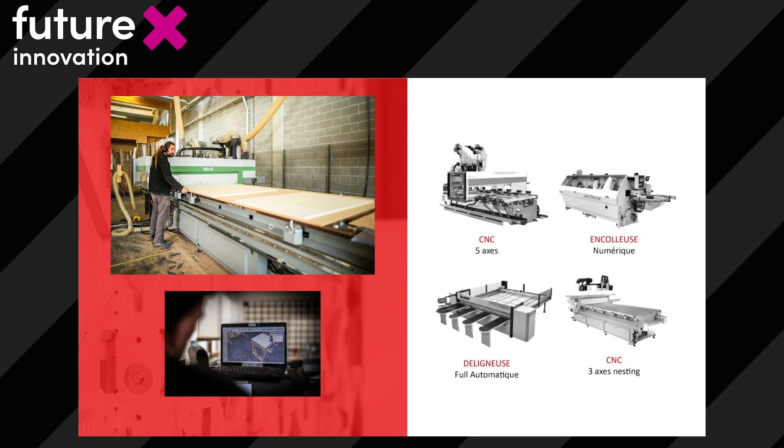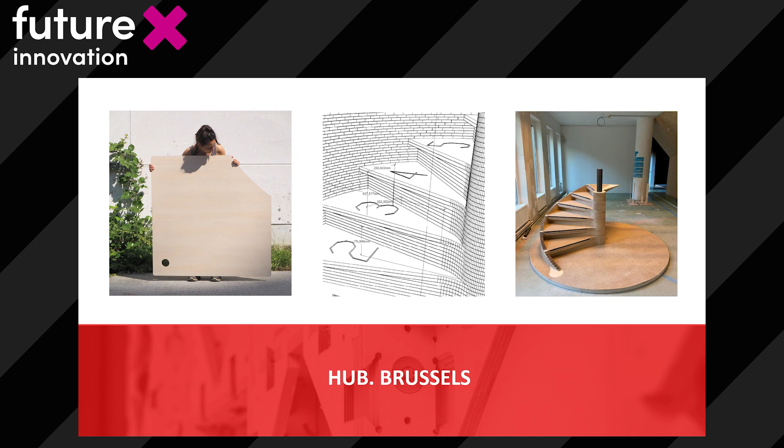I will show you 2 examples that we have realized. The first one is a staircase made with 600 tables from the former cafeteria of the European Commission, which is located 8 kilometers from my workshop. We processed more than 1,500 pieces assembled one by one for this project. It was very fun. So you can see the table we used, the beginning of the construction, and this is what it looks like now. And I like the idea to make stairs with a table.

The second one is a bench. It's a bench sculpted in 3D and made with old laminated beams that we reclaimed from a construction site 500 meters from our workshop. So you can see the laminated beams. I think it was 40 pieces. It's always a big puzzle. And when it's finished, it looks like that.

So I said I have 2 companies, so this is what I do with my first one. And with the second one, in this will to build differently to save our resources, we also develop our own product, the mods. So the mods is very simple. It's a small wooden frame that we use to create a structure.

That structure can be a stand, an office partition, reception desk, a structure for a theater set, a podium, store layout. And on this structure, we put finishes and accessories according to the customer specification. This allows us to have a multi-sectorial product that can be assembled, disassembled, reused, and evolve over time. You have some examples of what we can do with the mods. Here we are. This is a box office.

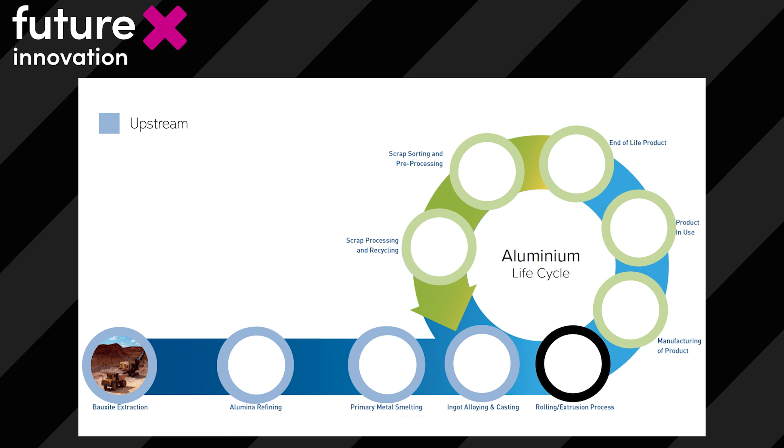Aluminium's life cycle is considered to be one of the greenest metals on Earth. Okay, so it's a very good green material. In terms of the life cycle of aluminium, we're not directly involved in the upstream process. So here we've got bauxite mining, alumina refining, smelting and casting. So that's making the aluminium itself. The part which we do is the extrusion, so that's shaping the profile.

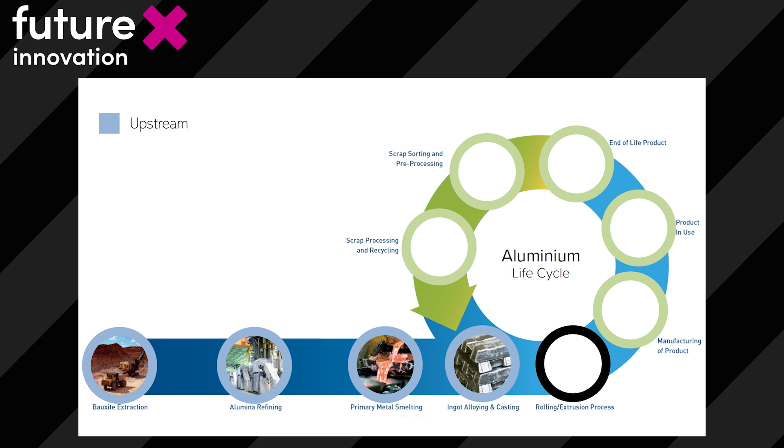Okay, so we're an extrusion company and we supply to manufacturers across the UK. Over 500 manufacturers make windows and doors and construction products out of our materials. So aluminium is a relatively new material, actually. It was actually discovered in 1825 by a Danish chemist, Hans Christian Ørsted.

At that point, aluminium was more expensive than gold. Okay, so it was a very expensive material to produce. It wasn't until 1886 that a high-volume, low-cost method of producing aluminium was produced, and effectively that made it commercially viable. It went from being more expensive than gold to being around the same price as silver. Okay, and it took 61 years development, so that's one of those innovations to make aluminium sustainable.

Okay, there we're not talking about carbon footprint, it's cost, but obviously the reduction in cost shows you what the embodied carbon was. It went from over $545 to $17 per pound. So 3% of the cost, a significant saving over 61 years. Okay, there's still further developments on aluminium as well. Alu plus C minus is a carbon initiative, so it's low carbon aluminium. So we're trying to reduce the amount of embodied carbon content within aluminium.

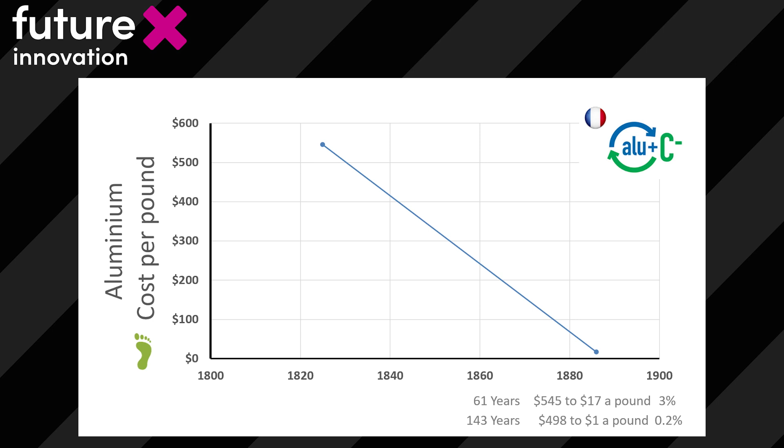As we probably all know, aluminium is 100% recyclable, and one of the important things about aluminium is it doesn't lose its material qualities when it's recycled. So aluminium can be indefinitely recycled. You can keep making new cans, new buildings, new different products out of that. So it doesn't lose its material qualities.

And one of the key drivers in that recycling is that aluminium, when it's recycled, only takes 5% of the original energy that the raw material takes. So there's a commercial incentive to recycle aluminium as well.

Recycling of PVC and other materials is relatively new, but with aluminium, when I was a young boy growing up, there was always a scrap man collecting aluminium. I remember Blue Peter, and there was a Blue Peter appeal collecting milk bottle tops. Okay, so aluminium has always been a material which has been very good for recycling.

The stats behind it are quite impressive, in fact. 75% of aluminium which has ever been produced is still in use today. Okay, so very little aluminium actually goes to landfill. So it's a very sustainable material.

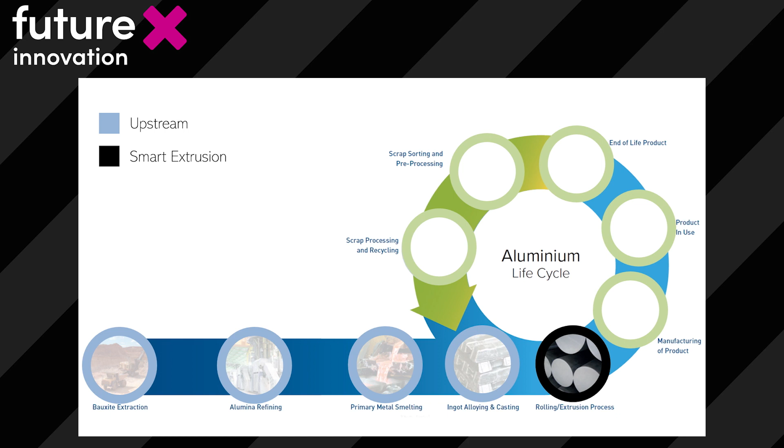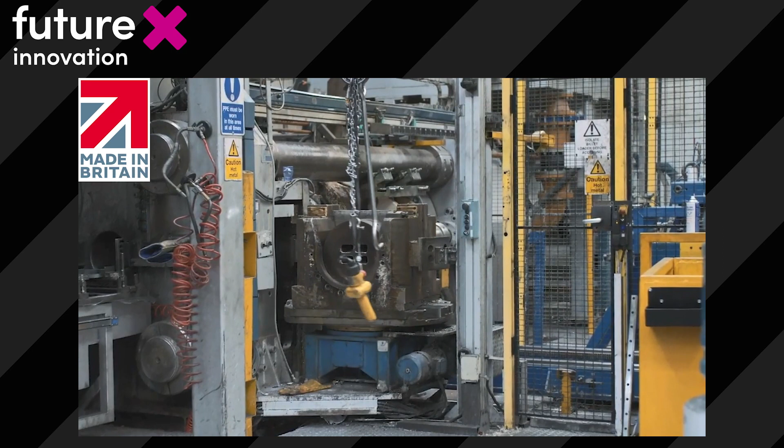As I said, Smart's process is the extrusion, which in the supply chain is that little area there. And I'll just show you our extrusion presses. What we do is we take the billet and we warm it up to about 500 degrees C. 500 degrees C, the melting point of aluminium is 600. So it's less than the melting point. It doesn't look any different. It's just got a warm temperature.

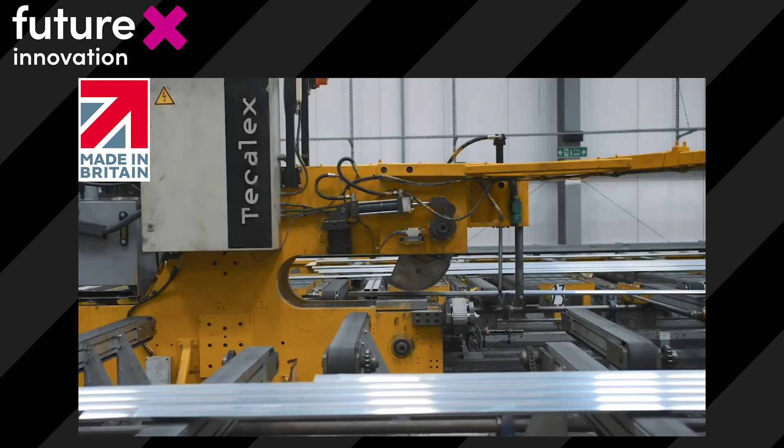But then we'll push it through a die. The extrusion die is shown here, and that shapes the profile. And this is a typical extrusion, which would just come out the other end. What Smart's supply is lengths of profile, which can then be used to make building products, whether that's windows, doors, or

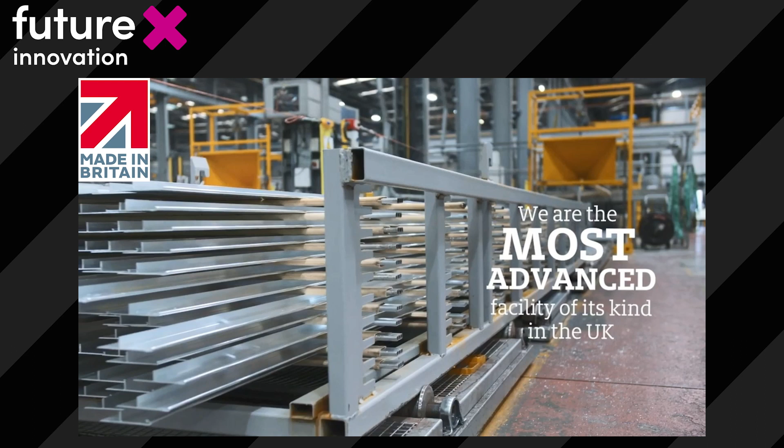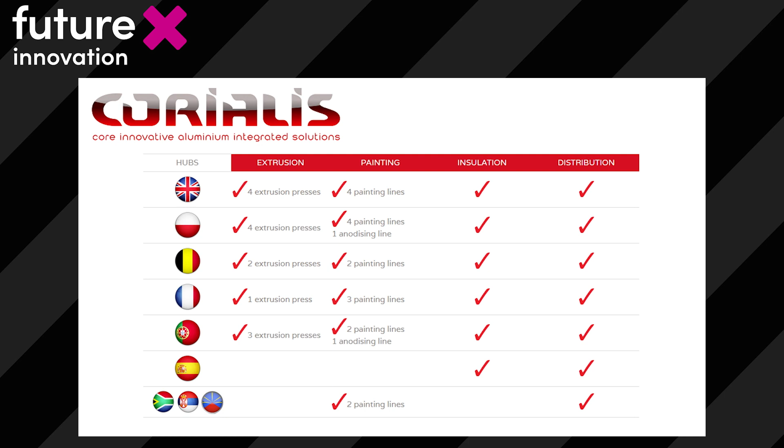different products. Our facilities: we've got 4 extrusion presses in the UK, and the output of those 4 presses is 40,000 tonnes. So a significant amount of aluminium is processed through that facility. We're part of a larger group, and across the group we've got 16 presses based around Europe, servicing each individual market. So we've got Belgium, France, Poland, Portugal, all with their own extrusion presses. We also do thermal breaks, and we also distribute out to the fabricator base.

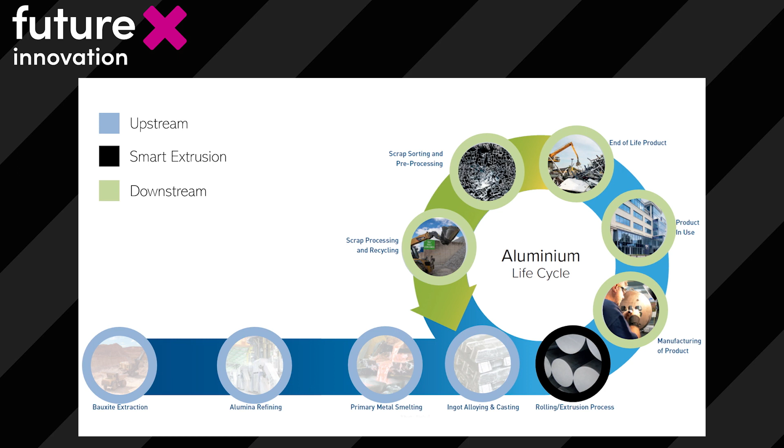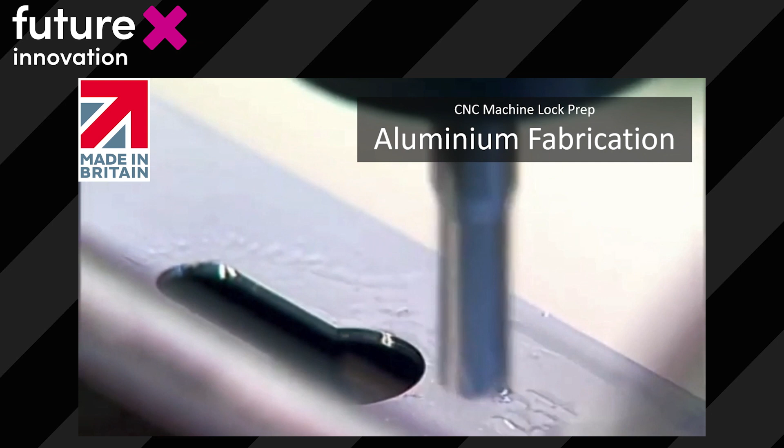Downstream to Smart's is the extrusion process. So Julien explained about CNCing of timber. Our fabricators, our manufacturers will take that profile and they'll do the preps in there. So there might be a hole, for example, for a keyhole. It might be a hole for a lock. So they'll prep and manufacture the material so it becomes a window or a door. You'll see the shape just being produced there is a keyhole for a window or for a door.

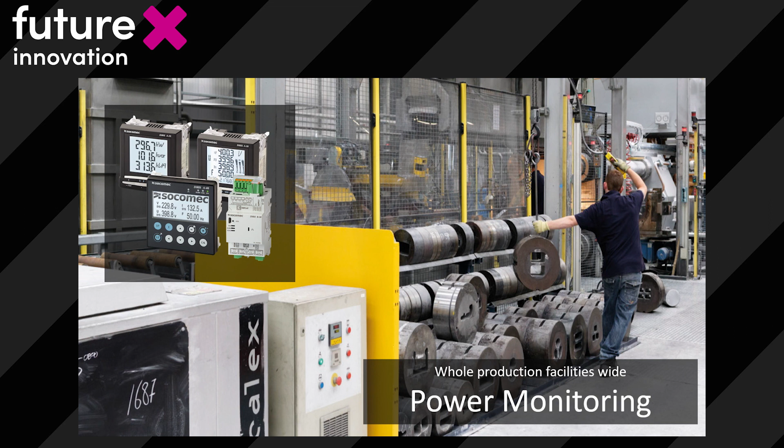Simple examples of that: every single piece of kit at Smart's has got a little device on it, and it shows you how much energy is being used on those individual devices. So it allows us to see if anything's malfunctioning. It also allows us to see if we can improve any of the equipment, and that reports to a central database. And that allows us to also predict what our greenhouse gas emissions are. And you'll see they've dropped significantly. So over 5 years, we've halved our greenhouse gas emissions.

So you saw our footprint increase, but over 5 years our greenhouse gas emissions have halved. That's partly through economies of scale, because we've expanded, we're doing more. But if we look in real terms, we're about a third less greenhouse gases than what we were in 2016. So significant savings in terms of the benefits of what we're doing.

The embodied carbon of a piece of aluminium is around 5 kilos of CO2 per kilo of aluminium. And that can be broken down to billet production, so the actual raw aluminium production, transportation to Smart's, activities, and then distribution out to our manufacturing bases. So it gives you an idea of the extrusions. Our contribution is about 5% of that, so the majority is the actual aluminium production, but as we've seen, there are already enhancements bringing down the aluminium production figures.

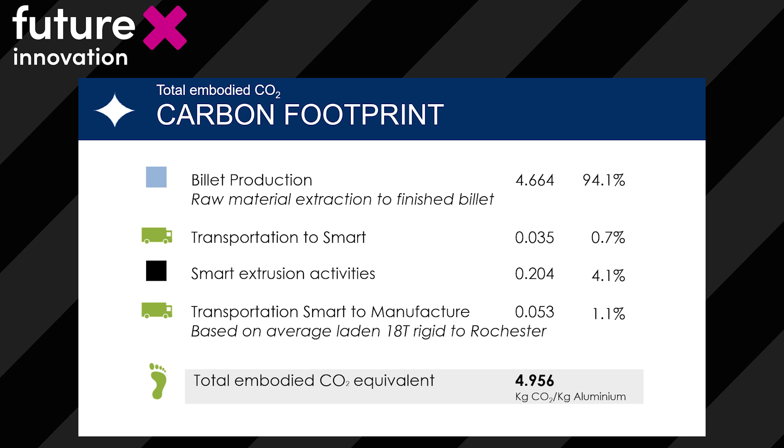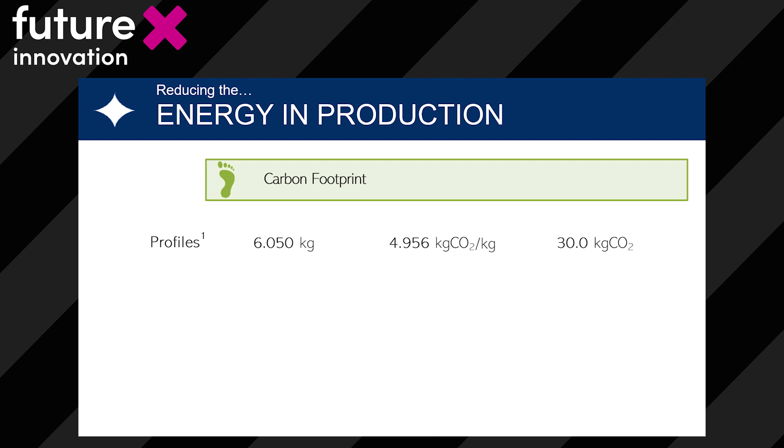If we look at a typical window, because 5 kilos doesn't really mean that much, this window is just over a metre wide by a metre high. The amount of aluminium in that window is going to be about 6 kilos. So if we said it's 5 kilos of CO2, it works out that we've got 30 kilos of CO2 on a typical window. If we compare that to the glass, this is based on Saint-Gobain's data. Saint-Gobain have got 34 kilos per square metre of product, so their contribution is about 50 kilos of CO2.

Okay, so the total on a new window is around 80 kilos of CO2. If you're wanting to work out what that is in real terms, it's around a car journey of around 220 miles. So the distance to smarts is about the embodied carbon in one window, so a car journey. So we can see we're very low in terms of our carbon footprint.

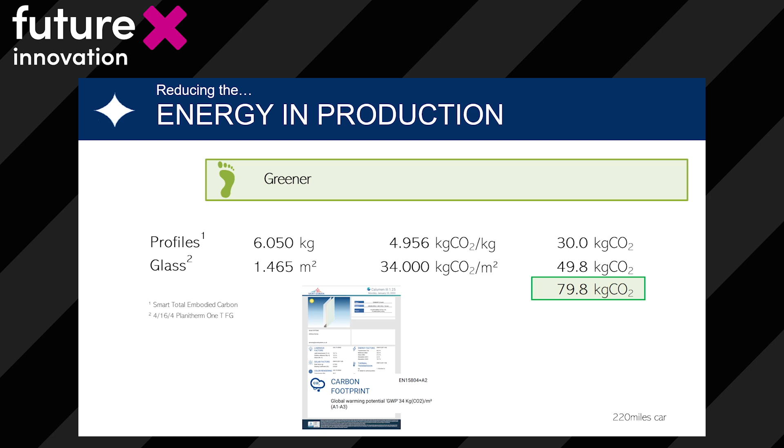What's probably of interest to you guys is how the windows can make things warmer. So that's the U value of the window, which is the energy efficiency of the window, and what energy savings we can entertain. Windows, they're not relatively new. We've been using windows since the 1700s.

It wasn't until 1995 that we had a building regulation for conservation of fuel and power. So any building stock before 1995, potentially if it's single glazed, it would be as high as 6, but the thermal performance of windows before 1995 was unregulated.

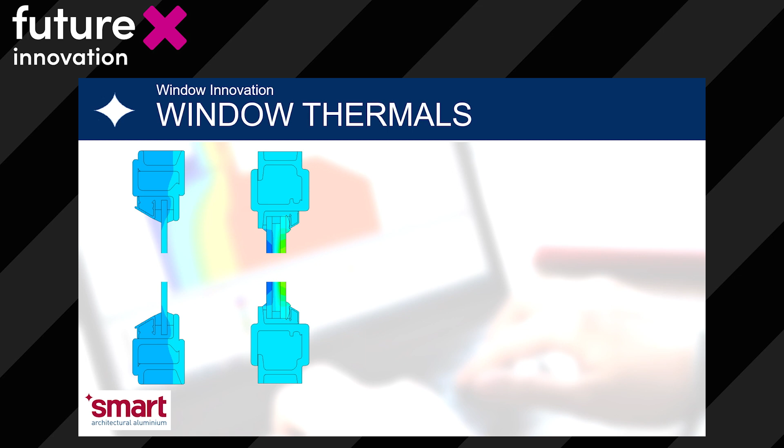So if we take a typical section of a single glazed window, you'll see the colour contours across there. It's all showing blue, so it's quite a cold window. The first generation double glazing would have been non-thermally broken frames, probably with an air fill instead of any gases within the cavities. So you're starting to see temperature differences across the glass, but the frames are still relatively cold.

Current generation of windows have got thermal breaks within the system, and we've got gas fills within the glass units. So that's a typical current double glazed system. It's got polyamide as a thermal break within the system, and that helps stop that heat transfer. So it stops that cold air going in, and it helps reduce that heat transfer across the window.

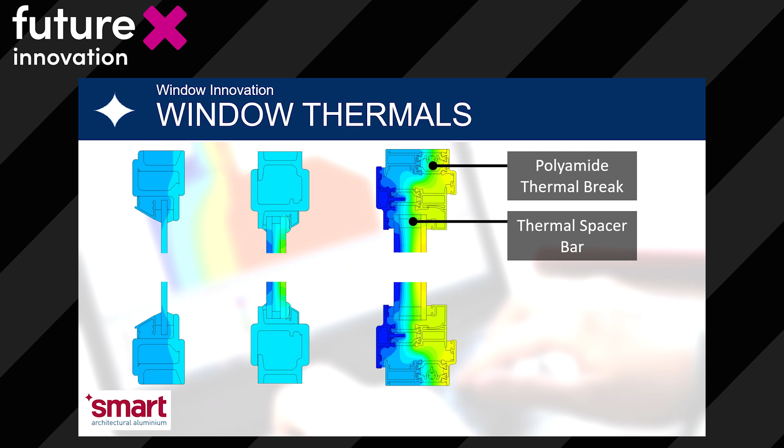The glass has got thermally broken spacer bars. If you look at an old-fashioned window, the spacer bars would have been silver. You'll see all modern windows tend to have a black spacer bar, and that's because it's made out of plastics, because it's the thermally enhanced spacer bars.

But glass technology has improved significantly as well. So we've got low emissivity coatings, which is effectively a very thin silver layer on the inside sheet of glass, which reflects the heat. If anybody remembers Pilkington's K adverts, Pilkington's K would be a low emissivity coating, which is a hard coat. And also we start to fill the glass up with argon. So that's thermal enhancements to a window.

The centre pane, which is the heat loss through the glass, for a typical single glazed unit, as I said, is around 6. For first generation double glazing it's around 4.74. For current generation double glazing with fills it's around 1.5. So Pilkington's K glass was 1.5, but they've improved the technology, gone to soft coats, and now we're looking at 1.0 as a centre pane. That gives you the heat loss through the glass as watts per metre squared Kelvin.

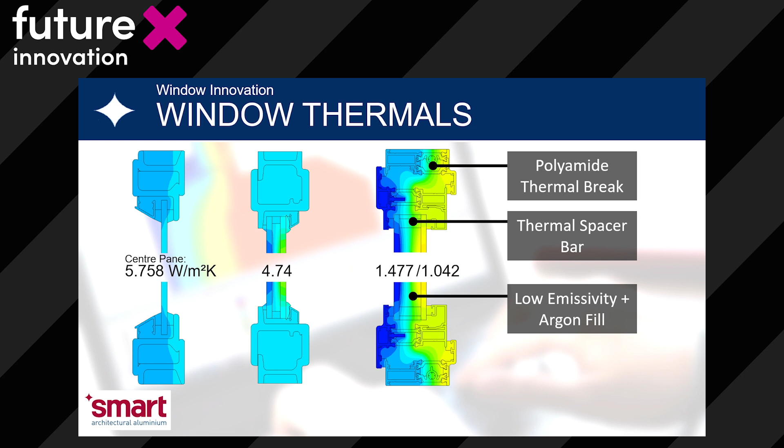If we look at triple glazing, things are moving on to triple glazing. Basically, we can halve our heat losses with triple glazing. So a 1.0 centre pane will drop down to a 0.5 centre pane. So it shows you what enhancements we can do. And really, we're seeing a lot more call for triple glazing, particularly in the new build market. It's now accounting for 5 to 10% of installations.

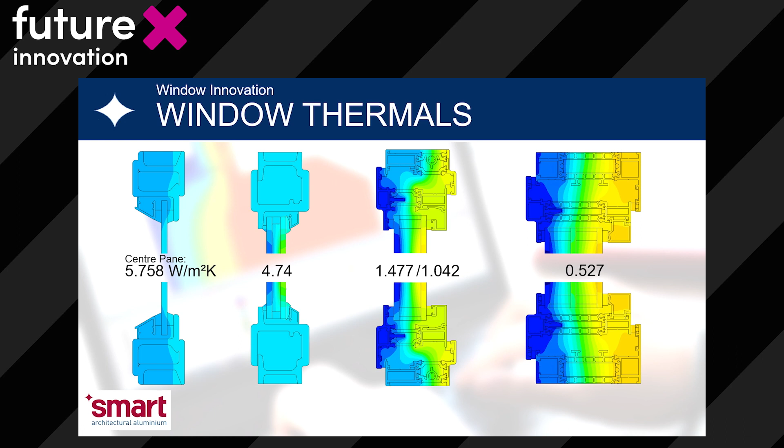Okay, they're centre panes, in watts per metre squared Kelvin, which don't really give you any sort of indication of actually what your heat losses are. That can be converted into annual heat losses, into kilowatt hours per metre squared, based on typical climate data. So this is based on BFRC UK climate data. So obviously if it was a colder climate, the savings would be higher. If it was a warmer climate, the savings would be less.

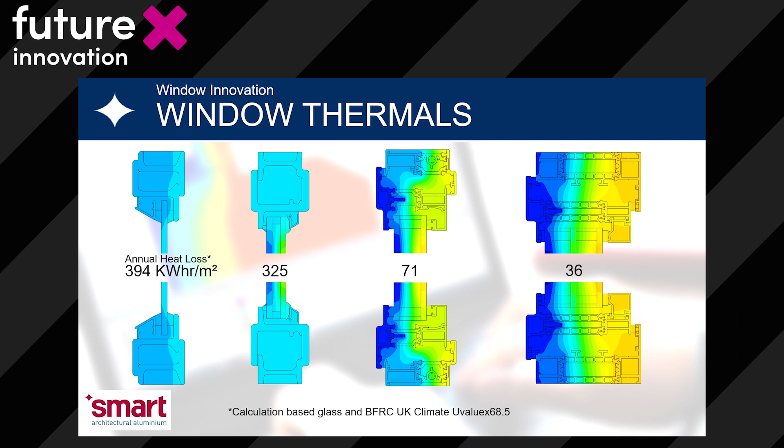But on a single glazed sheet of glass, typically you're losing around 400 kilowatt hours per square metre. On a first generation double glazing, it'll be 325, around 70 for current generation double glazing, and triple glazing is 36 kilowatt hours per square metre. That gives you the kilowatt hours, but everybody's interested in terms of the cost. So if we convert that to costs, this is the annual heat loss out of a window.

So the annual heat loss for single glazing is typically around £40 per square metre. For first generation double glazing it will be £33. A current generation double glazing is about £7, and you'll see we can halve that if we go on to triple glazing. But these are annual heat savings or heat losses through a window. So actually, when we look at the heat losses, we're talking about quite low numbers per square metre.

Sorry, I've got a bit of a tickle.

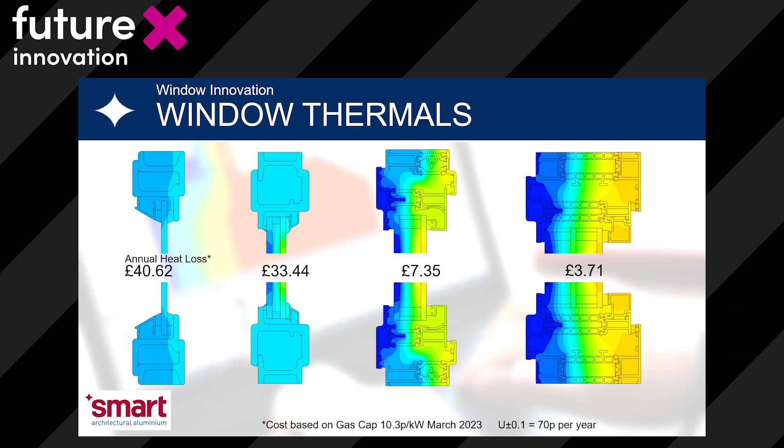So that shows you the actual heat savings. Obviously, it affects the comfort of the windows as well. We can accurately predict the temperatures of the window. So if we look at the internal surface temperatures, we go from being 4 degrees to being 15 degrees. And this has been simulated on a typical scenario of 20 degrees inside, 0 degrees outside. So it gives you what the expected temperature differences on those windows are. That allows us to accurately predict also at what point condensation occurs.

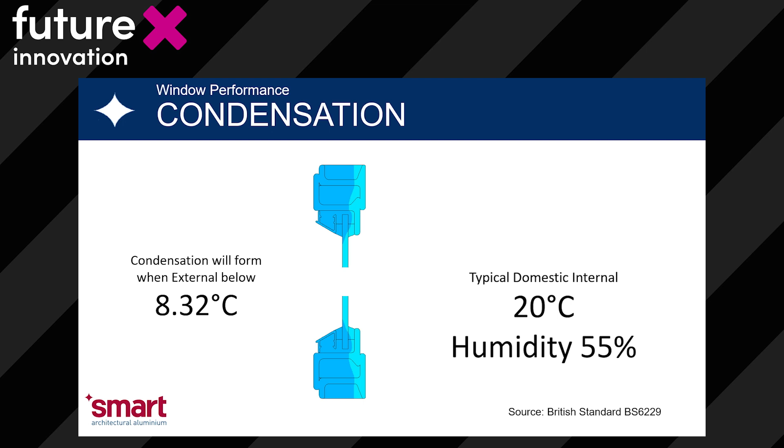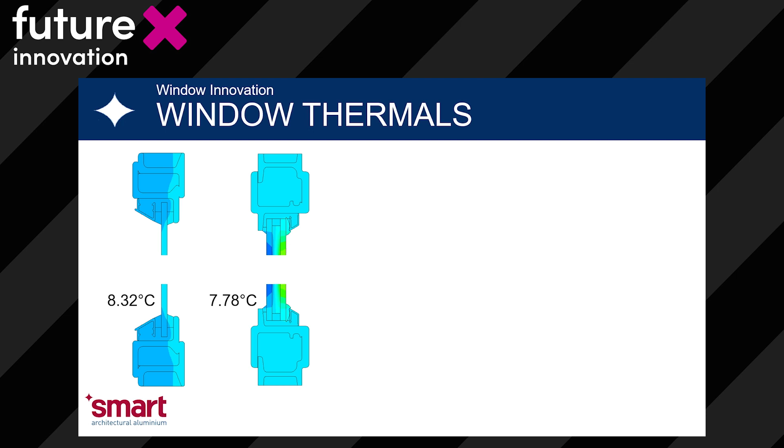Single glazing for condensation is quite likely. If we base it on typical internal conditions of 20 degrees C, 55% humidity, then condensation is quite likely to occur when the temperature, believe it or not, drops below 8 degrees. So on single glazing, condensation is very likely on the surface. First generation double glazing, because the frames weren't insulated, would still be around 7 degrees. Current generation double glazing, the temperature externally gets to around -6 degrees before we'd expect to see, in normal conditions, condensation forming on the frames.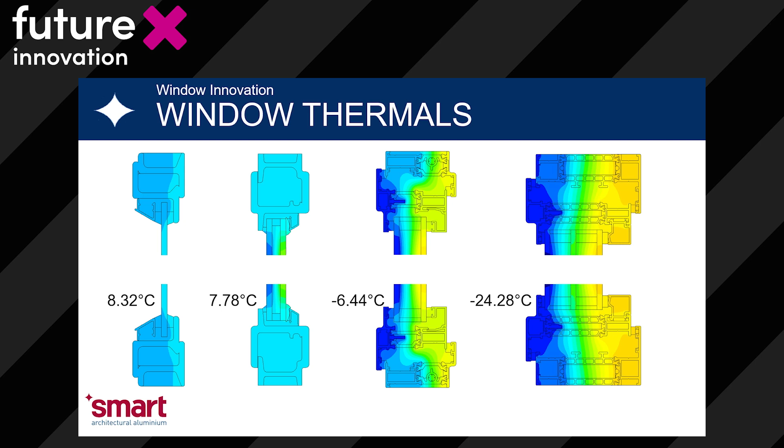Obviously the building fabric would have an influence on that as well, so these are idealised scenarios, but -6 degrees for double glazing. If we look at triple glazing, whilst it was only £3 saving per year, the condensation benefits are significant. It would need to get to below around -24 or -25 degrees before condensation is likely to occur on a triple glazed unit. So you can see significant benefits. That's around the lowest temperature which the UK has experienced. So by improving the building fabric, not only can we consider our heat losses, but also the risk of condensation significantly decreases as well.

So if we look at buildings, obviously we're in future build. Buildings account for around 30% of our greenhouse gas emissions. So in terms of achieving net zero as a country, we need to have a look at our buildings. But interestingly, if we're aiming for net zero in 2050, around 75% of the buildings in 2050 already exist. So we can't just do it through building new buildings better. We've also got to have a look at our existing building stock as well.

And that source was from 2019. So each year that goes on, we're still adding to that 75%. Some estimates are that potentially it's 80%. So actually the new buildings in 2050 will only be 20%. So as I said, we need to really focus on renovating our existing buildings to upgrade those performances as well. 1995 was the cut-off for building regulations. Again, there's a lot of buildings before 1995. I'll just finish off with a few case studies which we've done, and it'll show you some renovation projects which we've encompassed.

So this is Sully Hospital. It's in Cardiff, just on the outskirts of Cardiff. And it was a hospital which was used for treating tuberculosis before there were any remedies for tuberculosis. So the only remedy would be go and sit yourself by the coast and try and get better. So this hospital was particularly built for that.

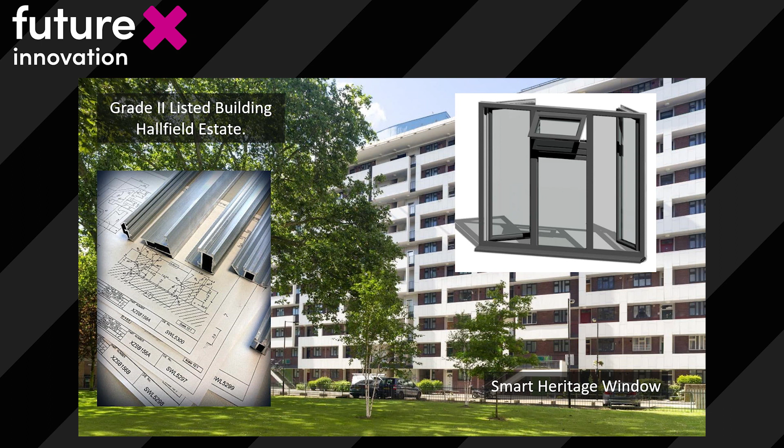But for that particular project, again, we did our own development. We developed some profiles which allowed us to do that in slim sight lines. So we had an open-in window and an open-out window, all with slim sight lines, and that allowed us to get that slim look. The annual savings of CO2 on that window is around 730 tonnes.

Okay, so on that particular project, if we're looking at car journeys, we said a new window is about 200 miles. The savings on that one project was 2 million miles, which is 82 times around the world. So significant carbon savings. We looked at the embodied carbon at the beginning, but the carbon savings of that is equivalent to taking 272 cars off the road. So significant savings across there.

Just to summarise in terms of Smarts, we're a £150 million business. We do 40,000 tonnes of aluminium a year. If that was just one profile, that's the circumference of the world in a year. So significant volume, and that's just supplied into the UK market. There's 600 employees, and we've been in operation for 45 years. So that just summarises what we're involved in.

I think the next talk is going to be about condensation as well, so it just leads on to that. But if anybody wants to see us or have a coffee, like I say, we're over on the stand over there. Hopefully that's given you an insight in terms of what Smarts do and what we are. An extrusion die is just there if anybody wants to see how we extrude the profile.

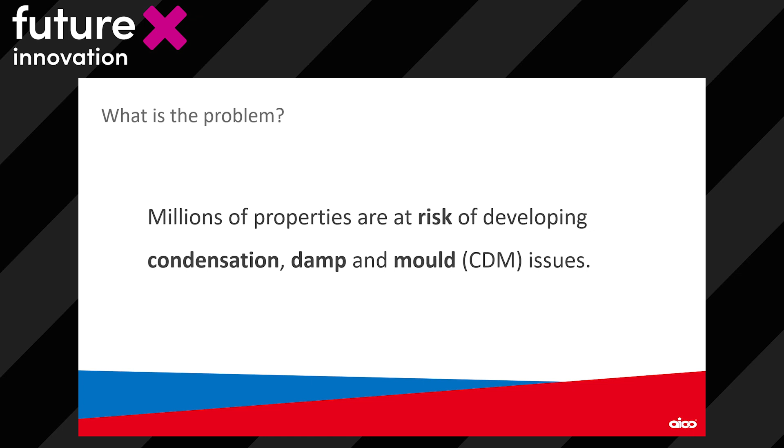My name's Adam Taylor-Drake from Aico HomeLINK, and I'm going to talk to you about one of the biggest challenges facing the housing sector currently, which is damp and mould. So what is the problem with damp and mould? Millions of properties are at risk of developing condensation, damp and mould issues. The task of adequately addressing risk factors is complex and requires a multifaceted approach. And this is made even harder by the fact that there's a lack of real-time monitoring and analysis, leading to high levels of non-compliance.

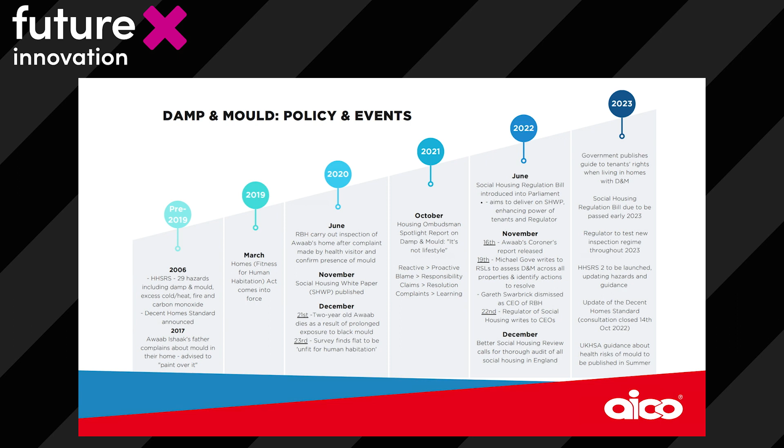So one of the things we're doing is pioneering real-time monitoring of environmental conditions, so we can help landlords pinpoint the issues and areas of risk. And the government has taken notice in this area as well. The Housing Ombudsman produced the Spotlight on Damp and Mould report in 2021. The first of the 4 main recommendations to senior management was to move from a reactive to a proactive approach. So what does that actually mean? Rather than responding to damp and mould complaints and then carrying out some kind of repair, proactive means detecting risk and then taking action before the issue develops.

The second recommendation was to move from inferring blame to taking responsibility, and this is particularly important when it comes to getting residents on side. The third recommendation is to move from handling disrepair claims through to resolution. So basically taking the complaint, actually resolving it and getting to the point where the resident's happy. And the final recommendation is to move from a culture of handling complaints to one of learning from mistakes, learning from best practice, and actually improving the way damp and mould is handled as a landlord.

So some recent developments in regulation in this area. There was the follow-up report to the Ombudsman Spotlight on Damp and Mould in February 2023, which removes resident action as a viable approach to this problem. It's now the landlord's responsibility to take action. It recommends a dedicated app to report issues, and also the use of a dedicated condensation, damp and mould dashboard, among other things.

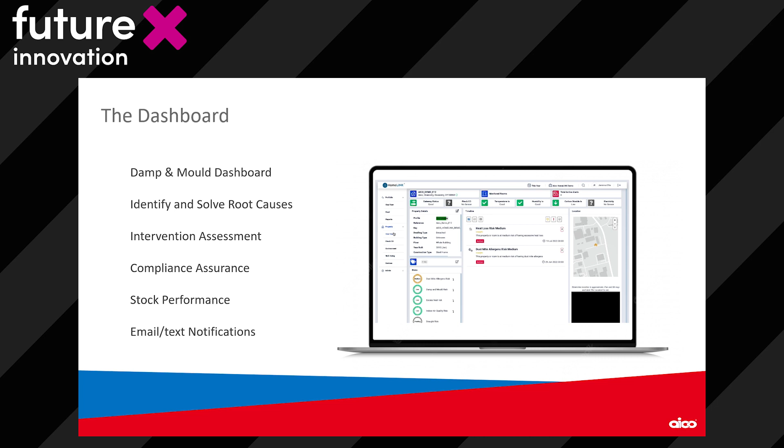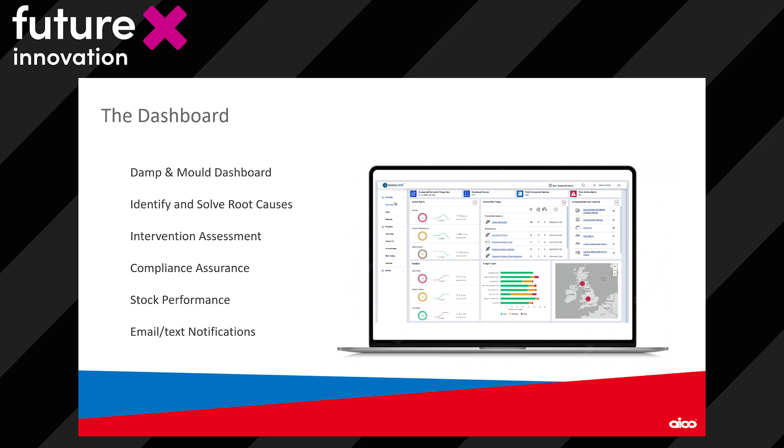So the dashboard is the focus of your damp and mould tackling activities. It allows you to identify and solve root causes. It allows you to carry out assessment on your interventions. It provides compliance assurance, so from early prediction and detection through to resolution, you can measure the effectiveness of what you're doing. It gives you a high-level stock performance of all your houses. And of course, you can send notifications to the relevant people, text and email notifications.

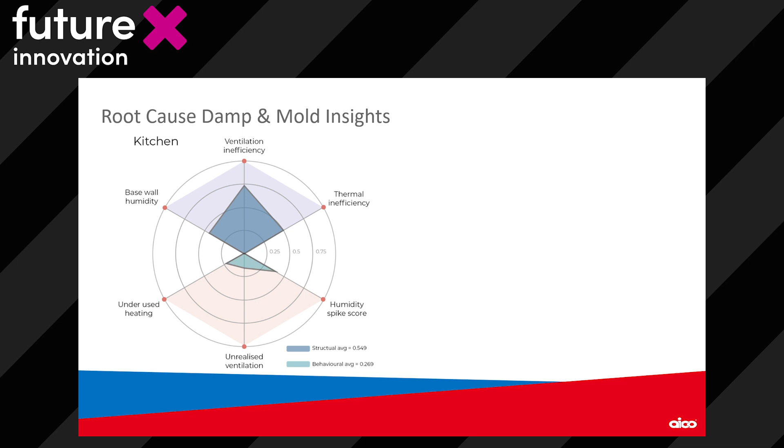So something that we've been working on for a number of years, and this is at the core of our system, is our data analysis, which is powered by machine learning. So the root cause analysis of mold and damp, we've divided it into 6 factors, which are easy to understand and easy to pinpoint in terms of where they're originating in the property. So the top part of the graph is your structural factors. These are things that in a typical home, the resident will have very little impact upon. It's the fabric of the building, things they can't change, such as the baseline humidity. Is there a leak or external damp source?

It was interesting reading through the coroner's report for Awaab Ishaak's death. It was actually noted that the ventilation in that property came from a corridor that was completely enclosed. So the air that was coming into the property was coming from an enclosed space that wasn't receiving fresh air. Another factor is heat dissipation. So is the property able to retain the heat that's being put into it? How effective is the insulation? And the third structural factor is the baseline ventilation. So as I mentioned before, how easy is it for the property to change the air in the room?

The bottom part of the graph is the environmental factors. So these are the factors that the property is being subjected to. The Ombudsman recommends not using phrases like behaviour or lifestyle. So these factors are things that the resident does have some ability to change, but it's something that has to be done as part of a learning process with the landlord. So potential ventilation, is there mechanical extraction at the property? Is it being used? Is it being powered down through cost of living and cost concerns? The heating consistency, so is the property being underheated regularly, or are there certain rooms that are being completely unheated?

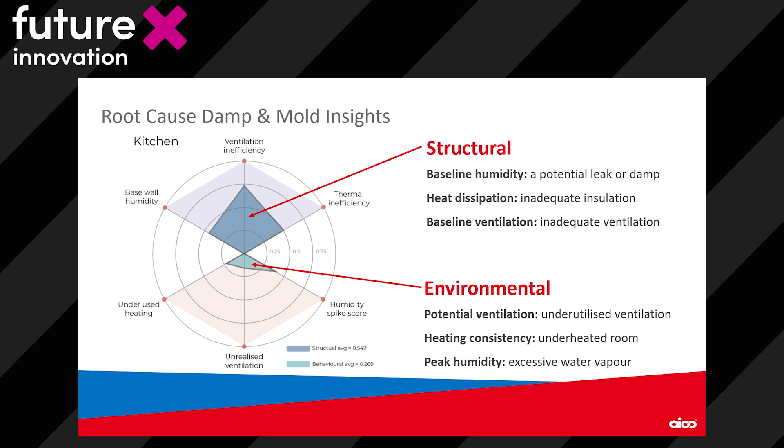So intervention analysis is all about using the real-time data and the analysis that our machine learning provides to be able to effectively pinpoint the causes of mold and damp, but also to measure the effectiveness of anything that you've done to try and remedy that. We hear a lot of landlords talking about this compliance golden thread, which is where they're able to show detailed information about when an issue was detected, what the conditions were like before that detection, or what the conditions were like before that complaint was made, and what the conditions were like afterwards, after a piece of intervention.

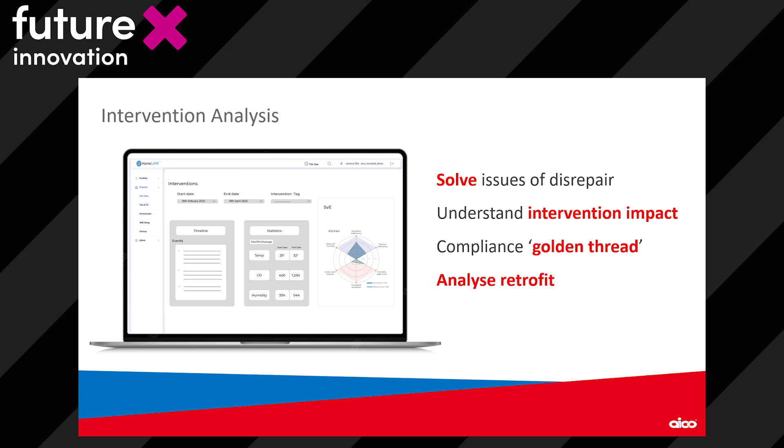So if you think about how you do that without real-time monitoring, it's very difficult. We've been working with landlords who are currently installing damp and mold, essentially humidity data loggers. They go and put them in for 2 weeks, and then they go and collect them. And the only bit of information they've got is that 2-week period, so it's not as effective as a continuous monitoring program.

To give you a recent example, here is some data from a real property, and what you can see on the graph there is the temperature between the recommended minimum and maximum. So we're looking about 18 degrees to about 23. So this property's sitting within that quite comfortably. However, in terms of humidity, this property had a serious problem of high humidity for a sustained period of time. So you can see here that above the recommended maximum level, this property spent most of its time hovering around the sort of 80% level.

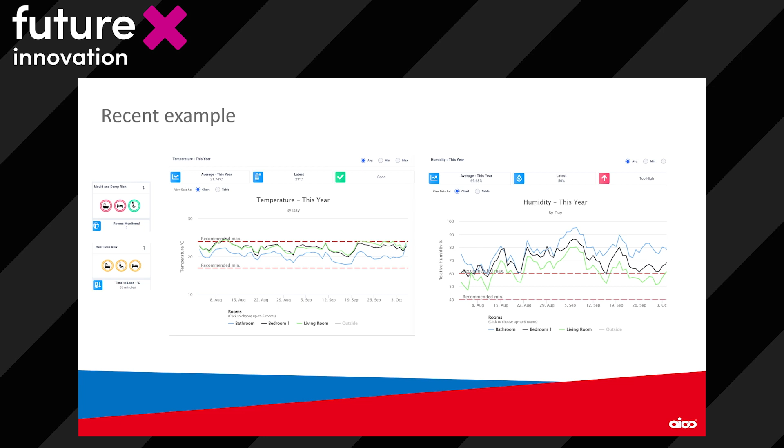So at this level, humidity is going to form condensation, the walls are going to be damp for a longer period of time, and there's a much higher risk of damp and mold forming in this property. By taking intervention, the landlord is able to monitor how effective that intervention has been. So it might just be as simple as messaging the resident and saying, you need to ventilate when you're using anything that generates humidity, or it might be the installation of a new and improved extraction system. So the idea is that by knowing the point in time that the intervention was taken, the landlord can measure how effective it's been.

One of the ways that we help residents become more engaged in this process is we have the resident-facing app, the Resident app. And at the centre of this app is a little character that we call Linky. He's a little fun guy that the residents can kind of get to know, and also they try and make him happy. So one of the things that a lot of residents get in touch with us about is how do we make our house happy? How do we make our house green?

So the face and the mood of Linky will change based on the conditions in the house, and it was designed as a way to engage residents more in the process, show them the data that's being collected. But what we found is it's become a central part of the journey that a landlord will go on with their residents to try and tackle mold and damp. So the residents love the app. The residents are trying to make their house green, trying to get everything in the Goldilocks zone, as we call it. And the landlord can then surface messages to the resident and say, you're doing a great job, or maybe you need to do a bit more to ventilate your kitchen.